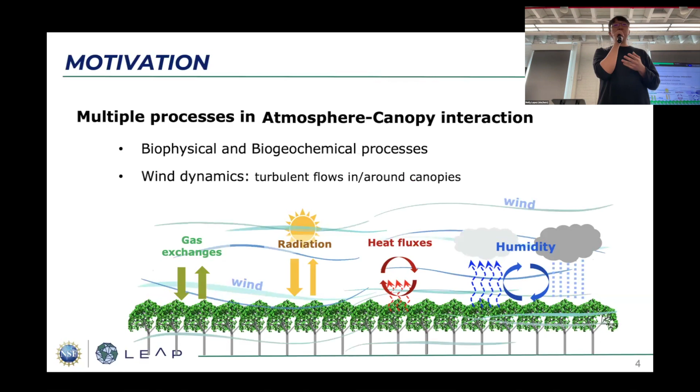Our interest is airflow-canopy interaction problems, and there are multiple processes between airflow, atmosphere, and canopies. First of all, there are biophysical and chemical processes such as gas exchanges and radiation, heat, and humidity fluxes. Another essential component is wind dynamics regarding turbulent flow in or around the canopies, which plays a key role in the various processes between the atmosphere and canopies.

In order to achieve a better understanding of microclimate, accurate predictions of airflow in canopies is quite an important issue. So this study mainly focused on providing a more advanced model for canopy flows.

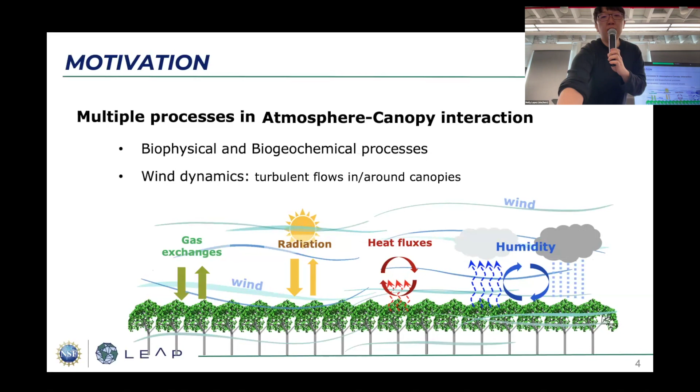But first, I want to briefly recap the existing work on the biophysical and chemical processes, which includes heat, humidity, and gas flux exchanges, related to photosynthesis, greening, sunlit shade, phenology, and so on.

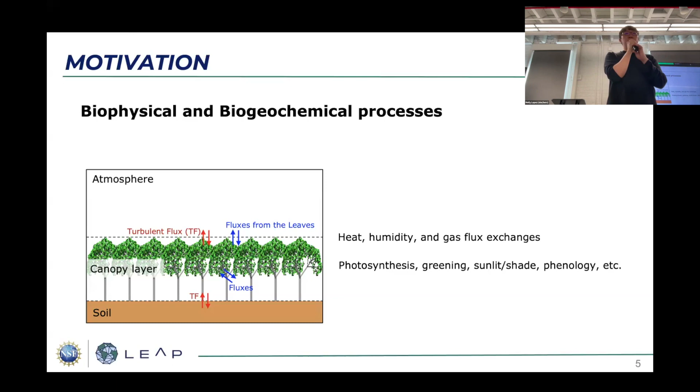In order to analyze these complex and multiple processes, there are a bunch of options. One of the most widely used, cheapest, and simplest is the single layer model. This model regards the canopy layer as big leaves, relying on homogeneous and isotropic canopy assumptions.

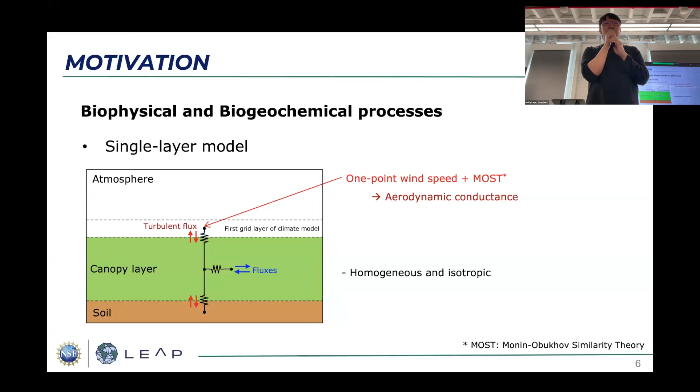I want to point out this model requires at least one point wind speed to assess aerodynamic conductance regarding turbulence fluxes between atmosphere and canopy layers.

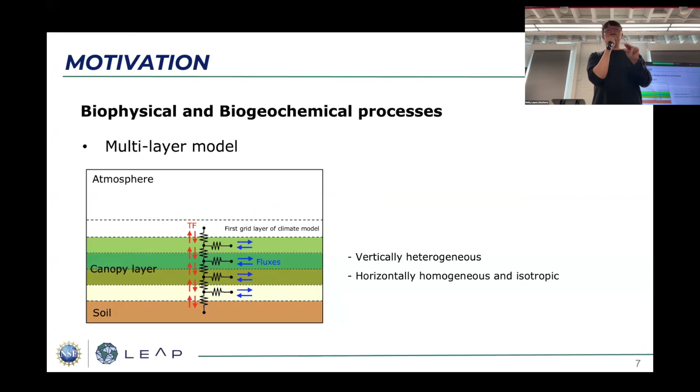More recently, a multi-layer model was proposed. This model can reflect the vertical heterogeneous structure of the canopies, but still relies on horizontally homogeneous and isotropic canopy distributions. This model requires a 1D canopy wind profile to estimate the turbulence fluxes between each layer.

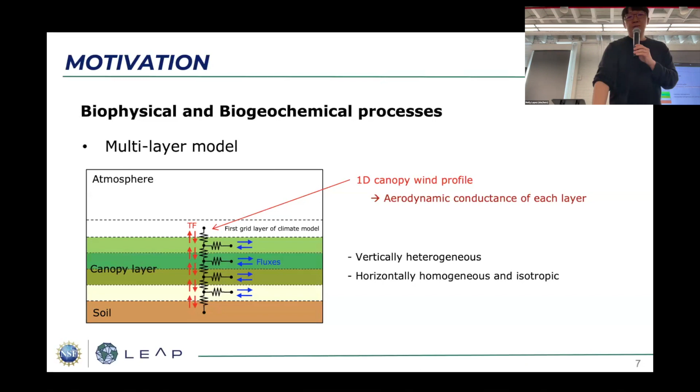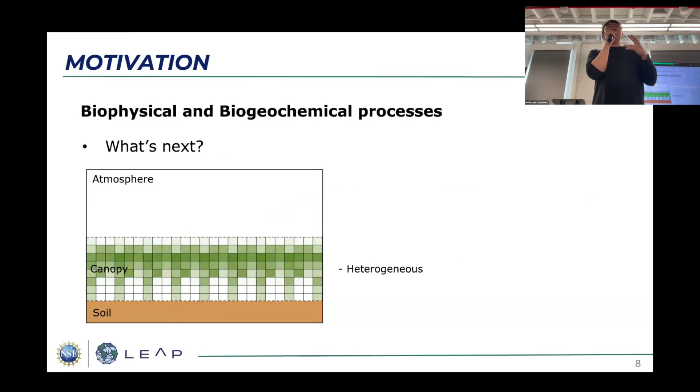As computational power keeps growing, the demand for more accurate prediction also increases. So what's next? In my opinion, it would be a much more advanced and accurate model that can handle heterogeneous canopies, so that we can deepen our understanding regarding microclimate situations.

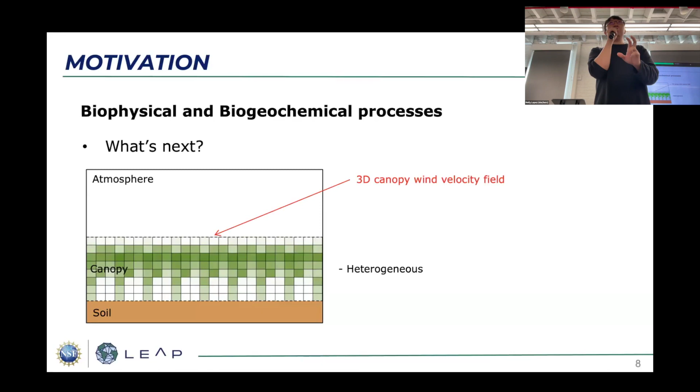These kinds of more complex models might require 3D wind velocity fields, but this is quite challenging to provide high fidelity simulations at these microclimate scales, due to its complexity and multi-scale nature.

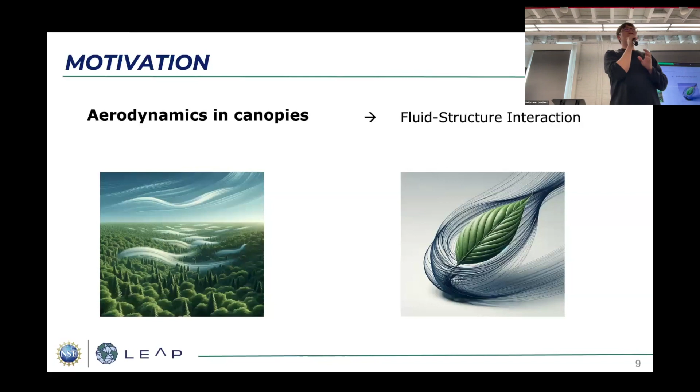Aerodynamics in canopies basically regards complex fluid structure interaction problems. This occurs on a broad continuum of scales, starting from leaf scales, trees, a bunch of trees, forest, and global scales. So if we want to provide high fidelity simulations...

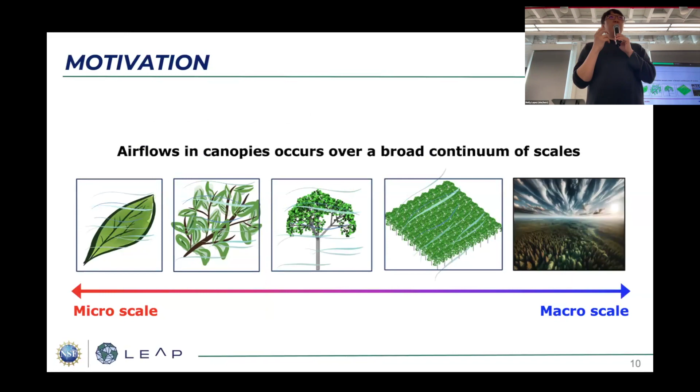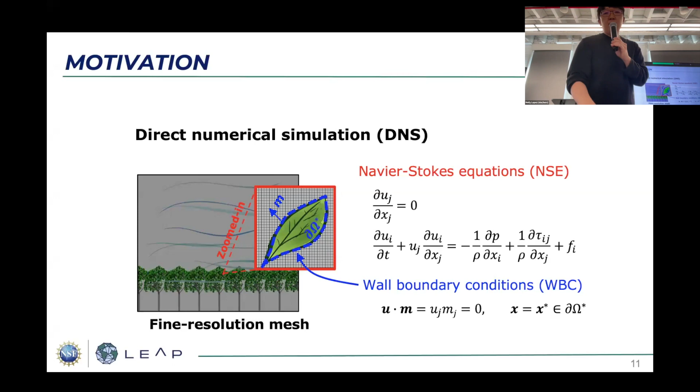...then the best choice is direct numerical simulation on fine resolving meshes, which resolve every single scale in the canopy and flow structures by imposing a wall boundary condition along the solid and fluid interfaces. But this requires a lot of computational cost.

This method can cover a bunch of leaves or branches, but it's not feasible for our scale of interest, microclimate simulations. So this is not a feasible way for our goal.

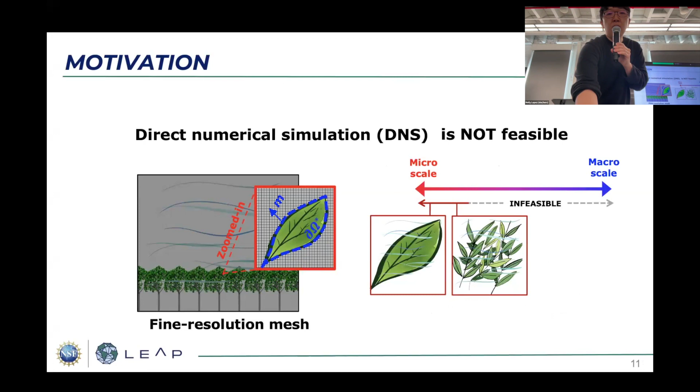Another existing approach is canopy drag models. This model neglects the physical presence of the canopies and just adds an additional source term, which has the meaning of a physical subgrid scale canopy drag effect.

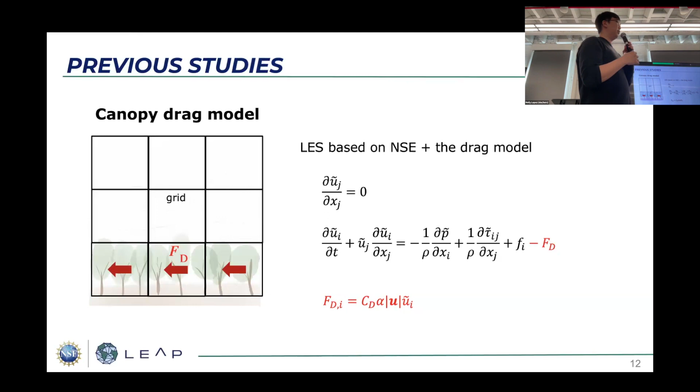This method is really easy to implement, but it adopts homogeneous canopy assumptions. So this method can only be applicable for quite large scales where homogeneous canopy assumptions make sense.

If we apply this method on heterogeneous canopies, it can be problematic because in these cases, the source term FD will contain resolvable information of some part of the inertial effect due to heterogeneities. So the parameter estimation for drag coefficient CD will be problematic in these cases.

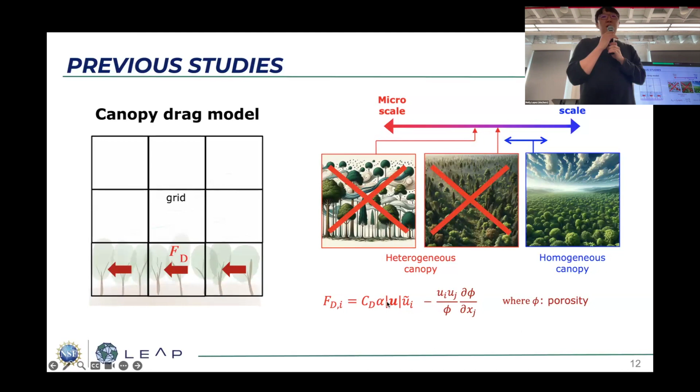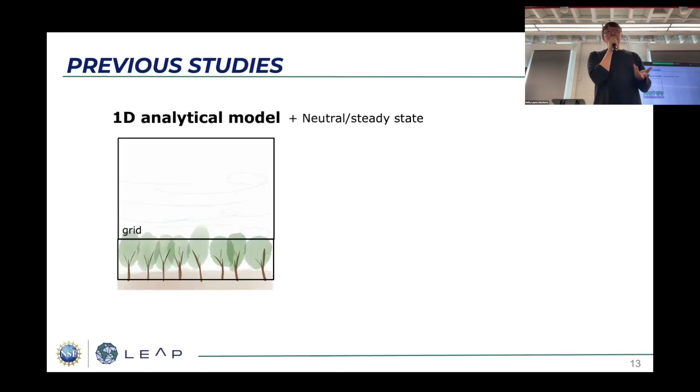Another way is adopting 1D analytic models. This model adopts additional assumptions, neutral or steady state. For flow over the canopies, the 1D model is used as wall models based on the concept of roughness height. For airflow inside the canopies, we solve a reduced version of the momentum equations.

This can be derived by applying a neutral state assumption and neglecting the inertial part, then we have this. Also utilizing gradient models and a mixing length hypothesis, and also using a canopy drag model, we can derive the 1D profile inside the canopies.

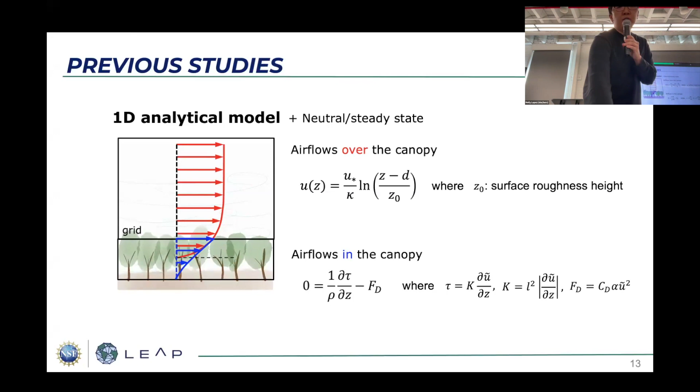Those models also adopt isotropic and homogeneous canopy assumptions, so they cannot be applied to smaller scale problems where anisotropy or heterogeneous canopies cannot be neglected.

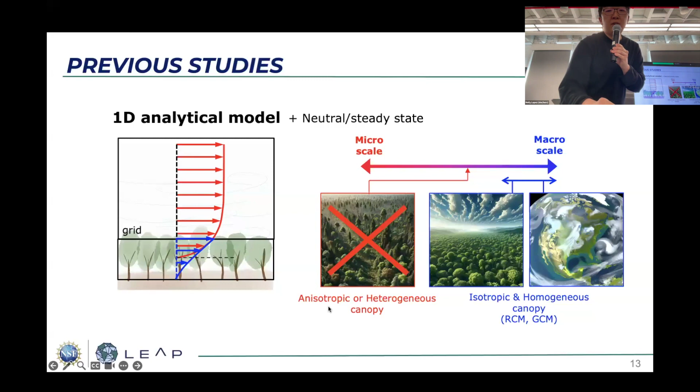The existing methods can be applicable only at a quite large scale, where the homogeneous assumptions make sense. Due to this assumption, those two methods have some limitation in terms of downscaling. And for DNS, a fully resolving strategy has its own limitation in terms of upscaling due to computational cost. So there is a missing gap, and the present study aims to bridge this gap by a multiscale method.

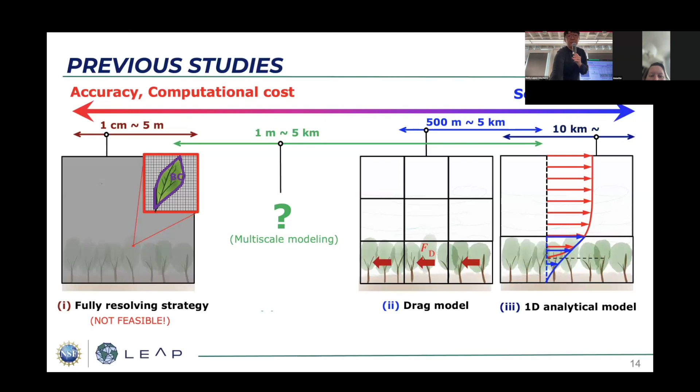In this range of scales, our scale of interest might be kilometers or hundreds of meters for the entire computational domain. In this case, the grid size might be a few meters, at least 50 centimeters, much larger than the leaf or smallest structure of the canopy. So we should consider a coarse grid model, where the grid size is larger than the smallest structure of the solid part.

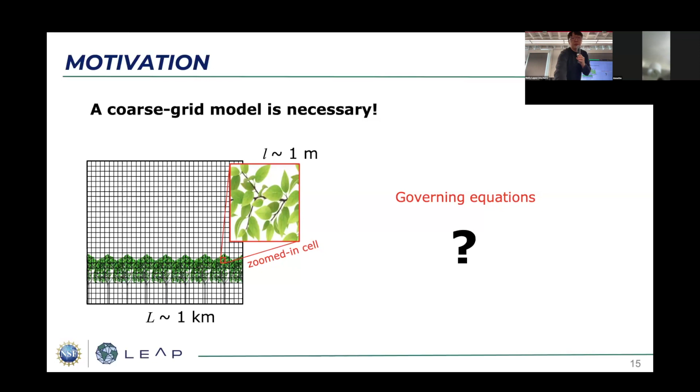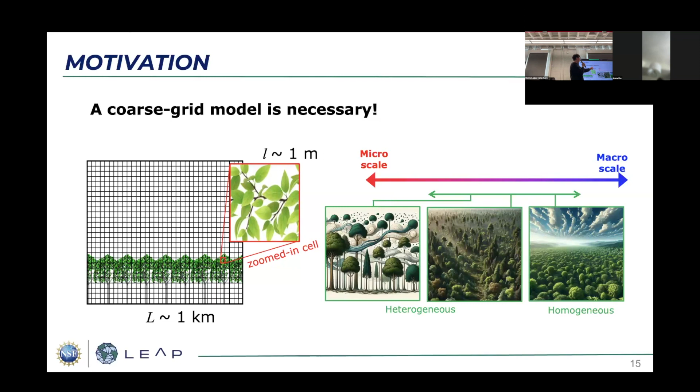So we need to formulate a coarse grid model, and it should be capable of handling heterogeneous situations, and implemented so it can cover the wide range of length scales to bridge the missing gap. For this purpose, we upscale the problem based on the volume averaging theorem.

In this, if we take the volume averaging, the solid part and fluid part in the given cells become homogenized, and they're represented by porosity, defined by the volumetric ratio between fluid and cell. Then the heterogeneous canopy fields can be represented by heterogeneous porosity fields.

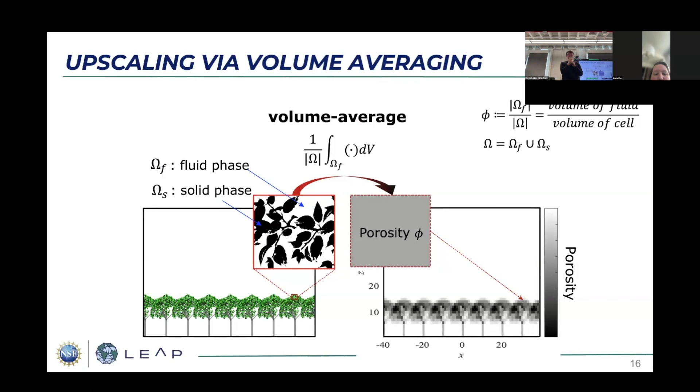Likewise, upscaling the incompressible Navier-Stokes equation, which is not feasible at our scales, gives us the volume average Navier-Stokes equation, which might be feasible. This formulation has two different scales: one is the resolvable scale, and the other is the subgrid or unresolvable scale.

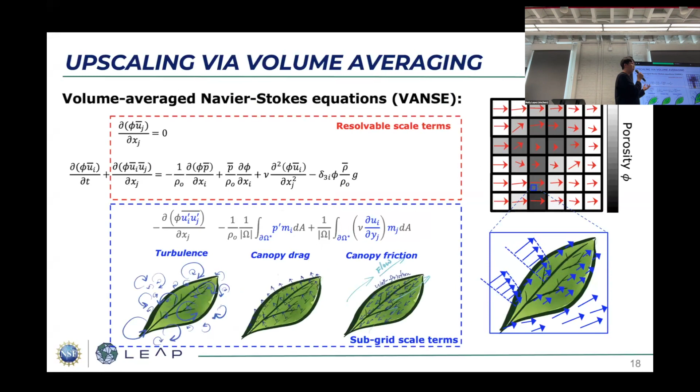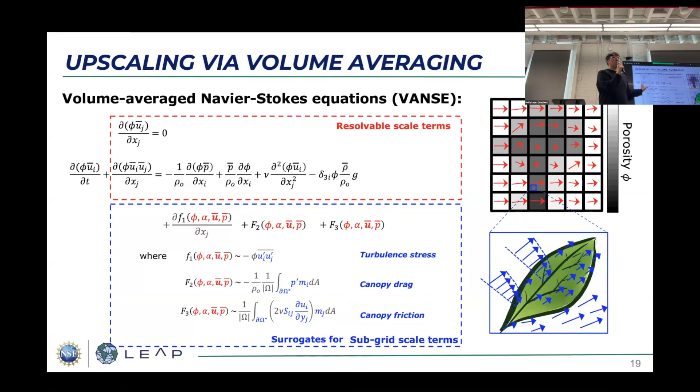The resolvable scale can be directly solved with numerical approximations on the finite grid system, but the subgrid scale terms cannot, because they include spatially fluctuating components, microscopic information much smaller than the grid size scale. So it should be replaced with surrogate models, and the surrogate model should be a function of resolvable variables to close the problem and make it solvable.

In order to do that, we proposed the following multiscale framework, which consists of a training step for the microscopic problem and a simulation step for macroscopic simulations.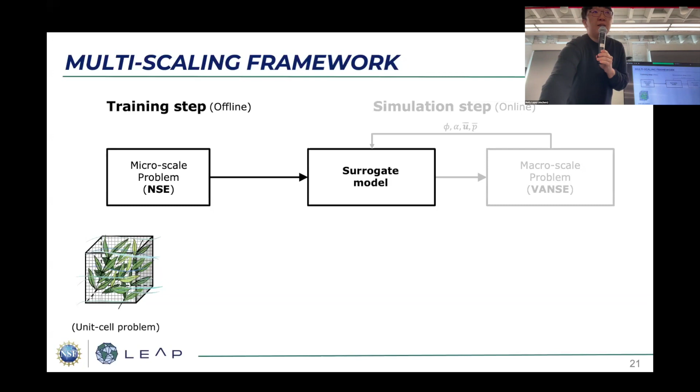For the training step, we consider a unit-cell problem, which is a representative and periodized microscopic structure of the canopies, and we idealize it to produce many unit-cell problems with varying parameters.

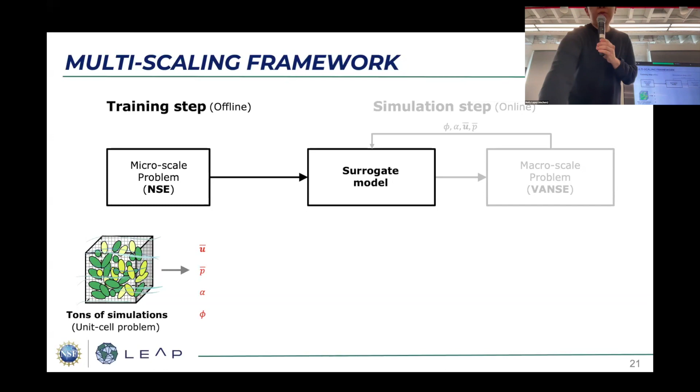Then for each unit-cell problem, we can directly compute the resolvable variable by taking cell averaging over the entire unit-cell domain, and we also directly compute the subgrid scale terms. Now we need to find the functional relationship from left to right, which will be done with supervised machine learning, and it will be coupled with the volume average Navier-Stokes equation solver.

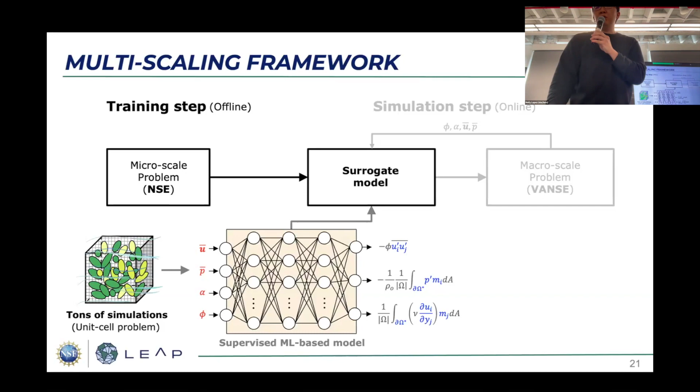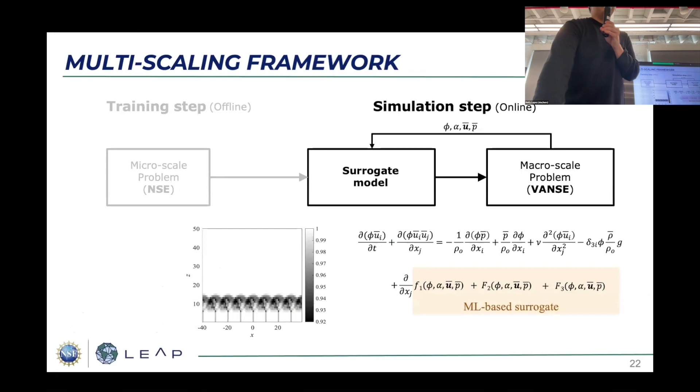Then in the simulation step, we solve these equations, where the subgrid scale part is replaced with the ML-based surrogate model. Once the problem is closed, we can solve it and perform the macroscopic simulation for canopy flows, like this.

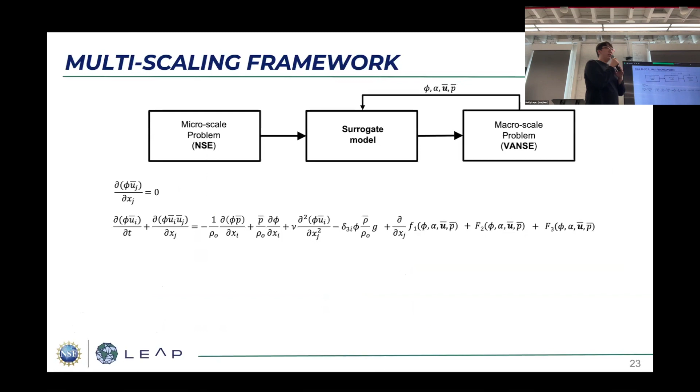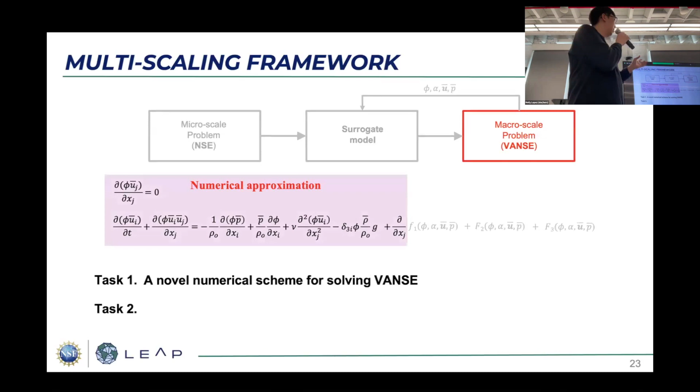In order to accomplish this framework, we need to complete two tasks. First, we need to implement a stable and accurate numerical scheme for the resolvable part of the volume average Navier-Stokes equations.

Second, we need to train the ML-based surrogate model for the subgrid scale terms in the volume average Navier-Stokes equations.

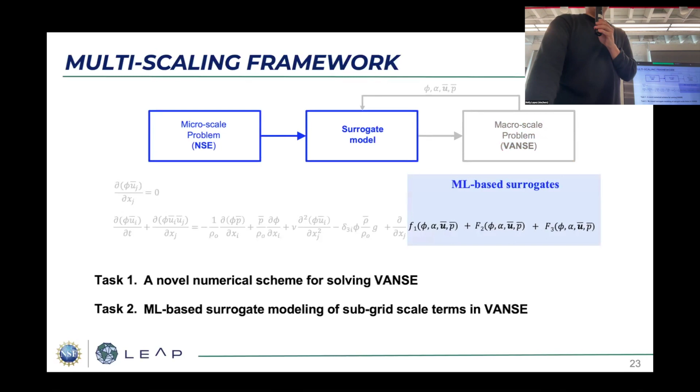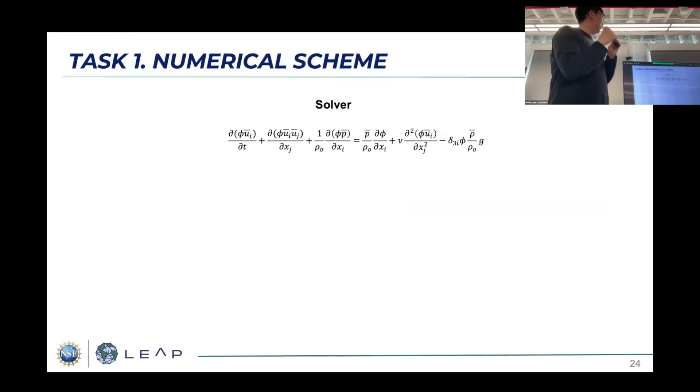For the first task, we developed a novel numerical scheme, and the story is quite long. To make it short, we implemented a high order method based on three schemes.

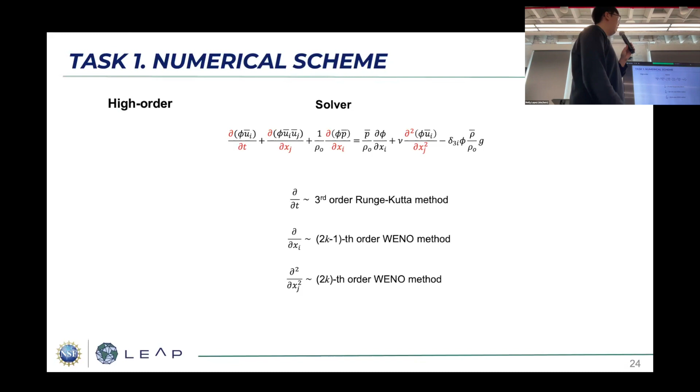First, for temporal integration, we use a third order Runge-Kutta method. For the first derivative, the spatial derivative of the flux term, we implement an odd order finite volume WENO method, and for the second order derivative we use an even order WENO method. We also formulate our scheme so it has a well-balanced property to achieve balance between flux and source terms.

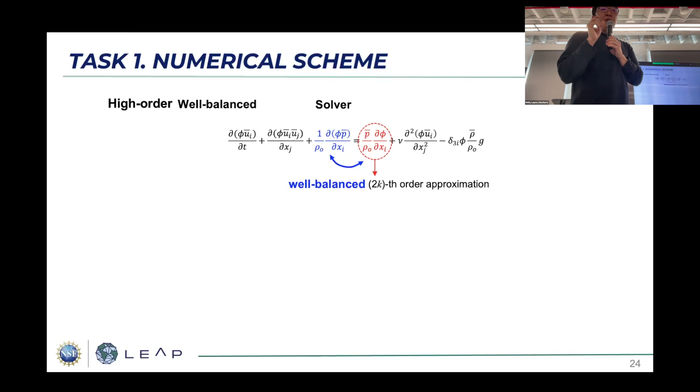This example shows a stationary condition with zero velocity over irregular porosity. Our solver preserves the stationary exact solution up to round-off errors.

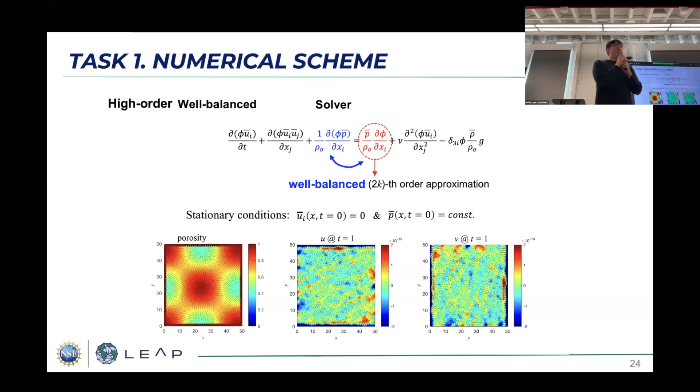If the scheme doesn't have the well-balanced property, unwanted flux occurs at the level of truncation errors, and it contaminates the entire domain. Fortunately, our scheme has the well-balanced property, so it's good.

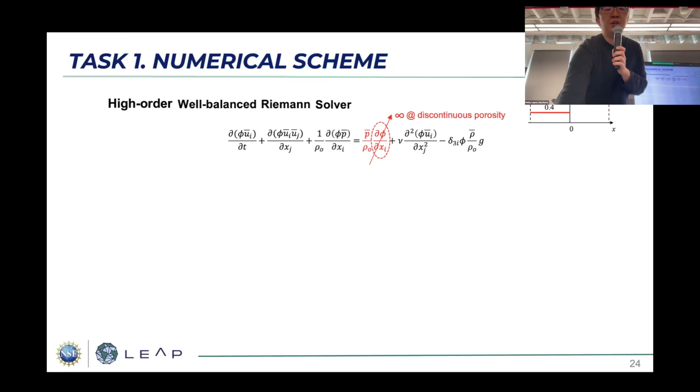We also consider a Riemann solver, which can treat strong heterogeneity situations, including discontinuous porosity.

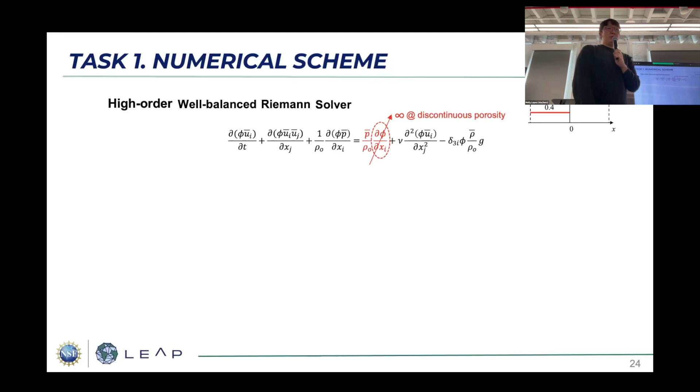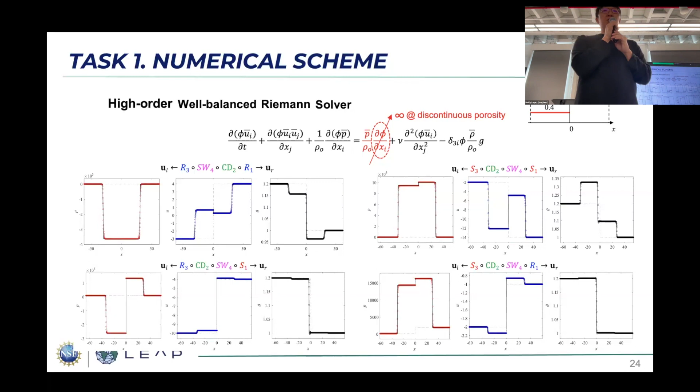In order to achieve this Riemann solver, we first derive the exact solutions of this discontinuous problem over discontinuous porosity, then we provide and prove mathematical theorems regarding the uniqueness and existence of discontinuous solutions over discontinuous porosity. We confirm that our Riemann solver, designed based on these theorems, satisfies them, so our Riemann solver can capture all types of discontinuous solutions over discontinuous porosity.

So, this study is prepared as a draft entitled like this.

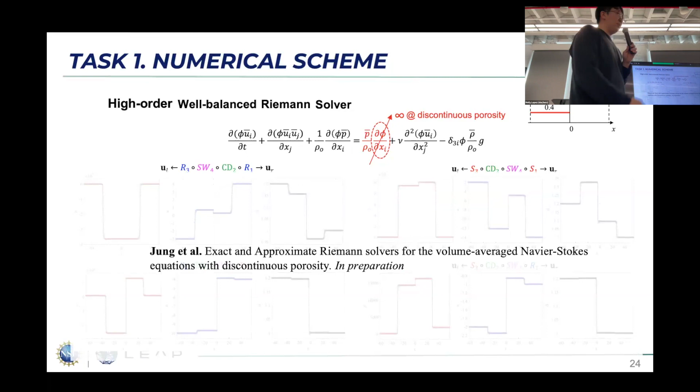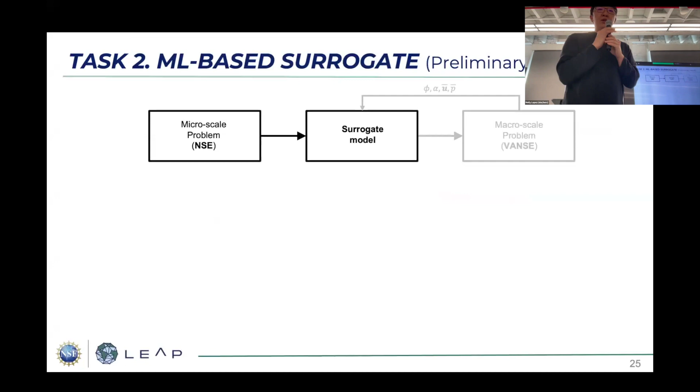For task 2, we need to build the ML-based surrogate models. First of all, in order to verify that our framework works or not, here we consider very simple unit-cell problems with only one single squared cube.

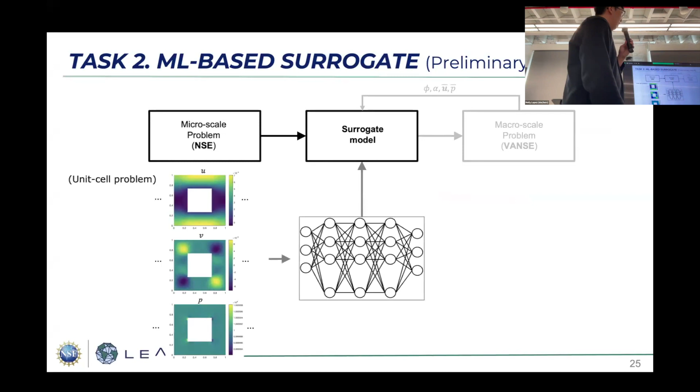Varying the size of cubes, the Reynolds number, and the flow angle, we produce tons of simulations, then train it and couple it with the volume-averaged Navier-Stokes equations.

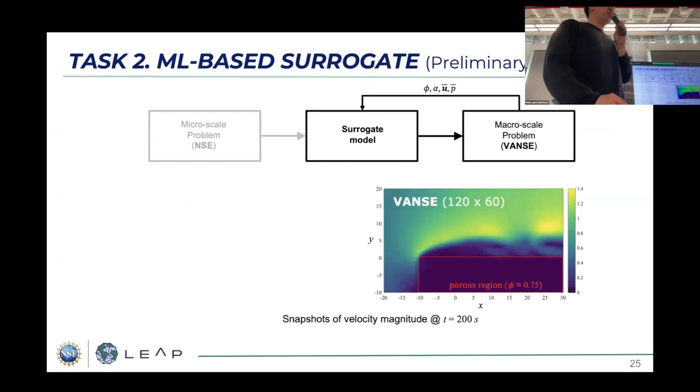Then in the solution simulations tab, it gives this kind of coarse resolution simulation, which shows good agreement with the reference solutions, the DNS solutions. So this is also another type of work.

My takeaway from here is if the unit cell problem is well designed, then the multiscale framework can yield accurate prediction.

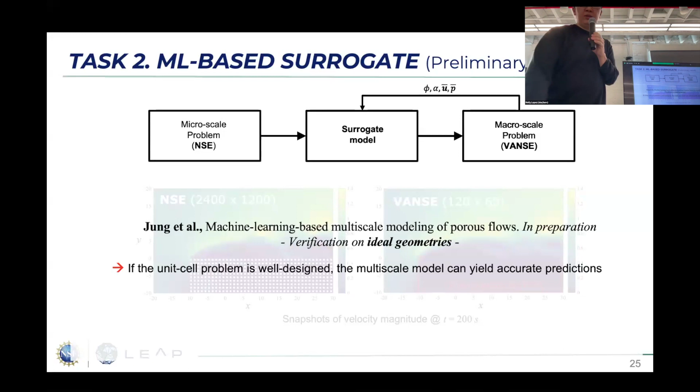So now, at this moment, we are challenging for the realistic canopy flows. And the major key question we are facing now is how do we design the unit cell problems for the plant canopies?

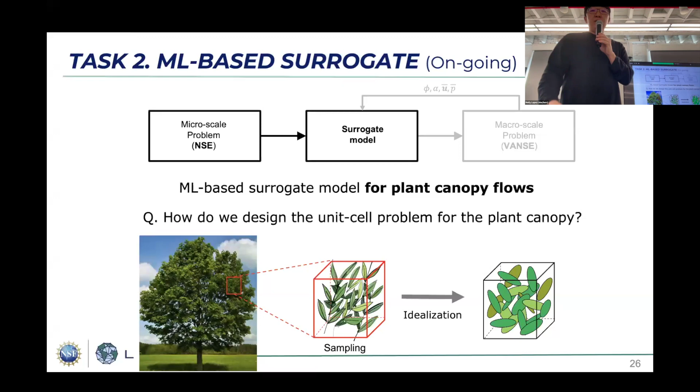So in order to do it, we implemented the artificial tree generator, comprised of a fractal branching part and a leaf structure approximating part. Then we have this kind of synthetic tree.

If we recognize the dominant species of the tree in the target area, then we can generate this kind of synthetic tree by giving that information to the artificial tree generator.

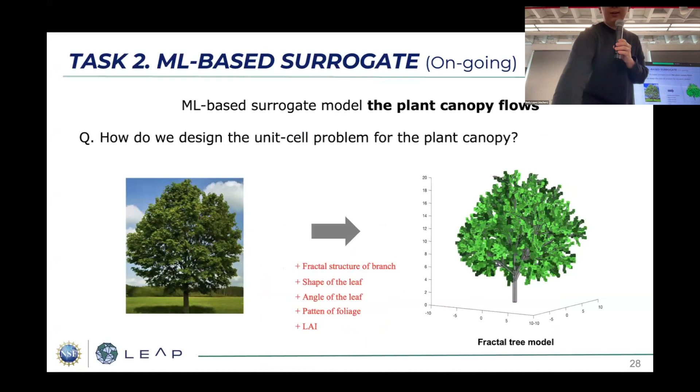If we divide the tree into two parts, part 1 is the crown part and part 2 is the trunk part. Let me explain part 1 first. We also implemented sampling modules.

Using this module, we can sample like this, the smallest structure inside of the canopies. This is what we have done so far, and after here is kind of a plan, future plans.

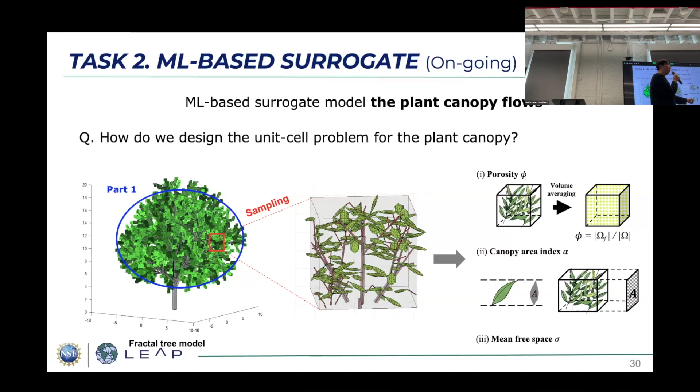If we sample here, then we can extract some geometrical parameters such as porosity and canopy area index, comprised of leaf area index plus branch area index. We also extract a mean free space between leaves or branches.

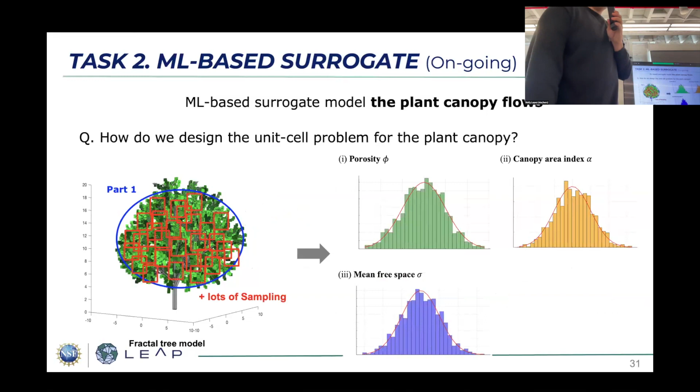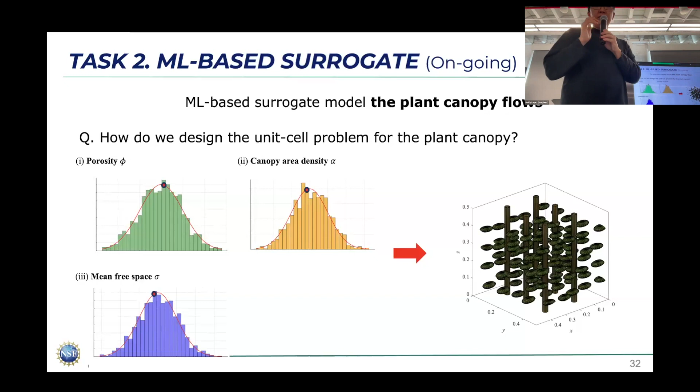A large number of samplings gives a PDF function for each parameter. Then based on this PDF function, we will generate a statistically ideal and representative unit cell geometry. This was for part 1, and part 2 is much simpler because it only contains the trunk part.

But basically we will resolve it using a boundary condition if possible. But if not, when the grid size is much larger than the diameter of the trunk, then we should consider a unit cell problem. The size of the unit cell problem can be different depending on the flow condition.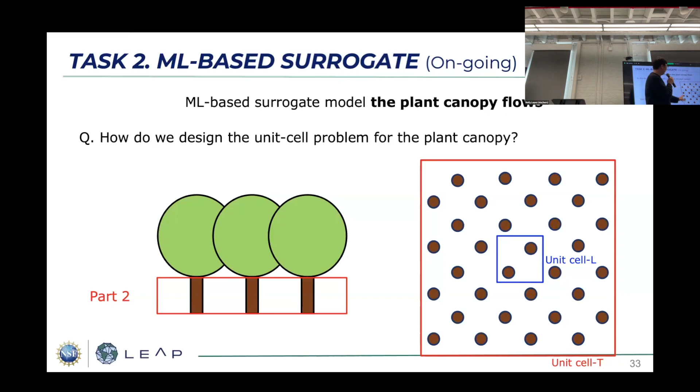So for laminar flow, the unit cell can be this size, and for turbulent flow, the unit cell should be much larger.

And this is our idea for how we design the unit cell problems. Using this geometry, we're going to train the surrogate models, and eventually we believe that our method can be extended to cover a wide range of scales by extending it to multiple steps recursively.

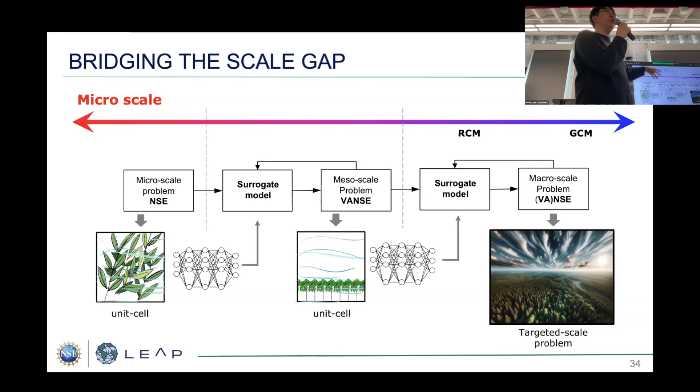And this is a summary. Thank you so much.

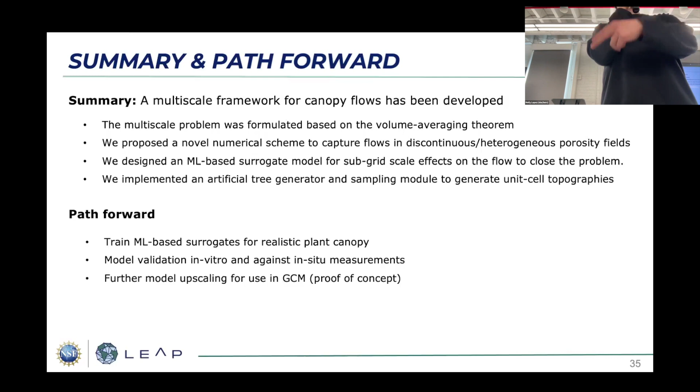So did you face some numerical instability when you ran the online simulation? Actually it's not, because our solver is a discontinuous solver, so even though there is a big difference between each cell, it can capture some discontinuous solution due to that. It gives some solutions, though we need to check if they are physically reasonable or not. But so far we don't have an instability issue yet.

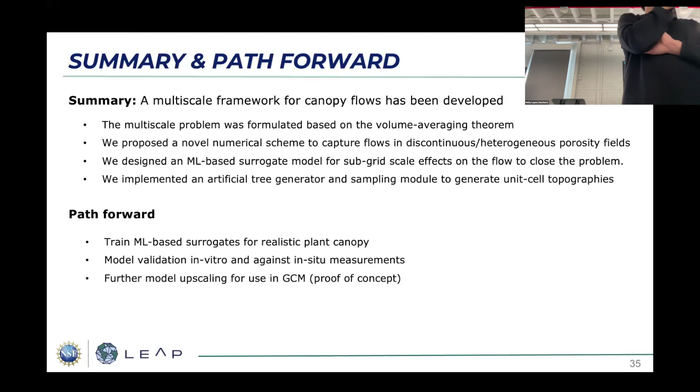Actually, that is our next step, to provide realistic validations. At this moment, we've checked the advantage of our model in terms of mathematical aspects so far—it's mathematically more stable and can cover a wide range of scales. So your question might be our next step.

We are looking for very nice in-situ observation data so that we can show our superiority compared to existing ones—where the existing method cannot capture something, but ours can. We're trying to find good application areas like that, but not yet. I can't say my model is always good in physical applications, because I don't have evidence yet.

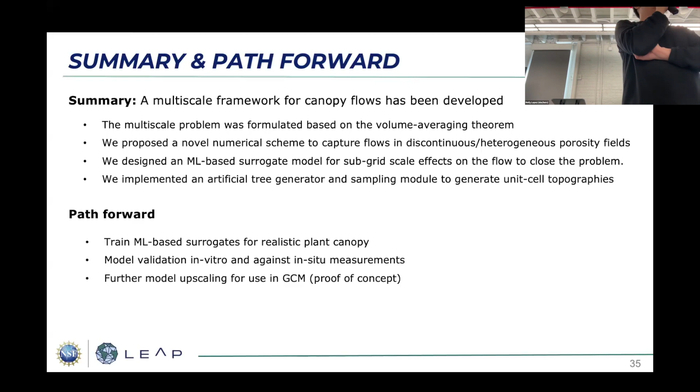And we have a question from the chat: sorry if I put the inflection in any weird places in these words, I am not a modeler. Shouldn't it matter that the trunks are currently spaced in a diamond grid? There are genetic algorithms for plotting—is this what you're talking about now? I don't think it would be as laminar.

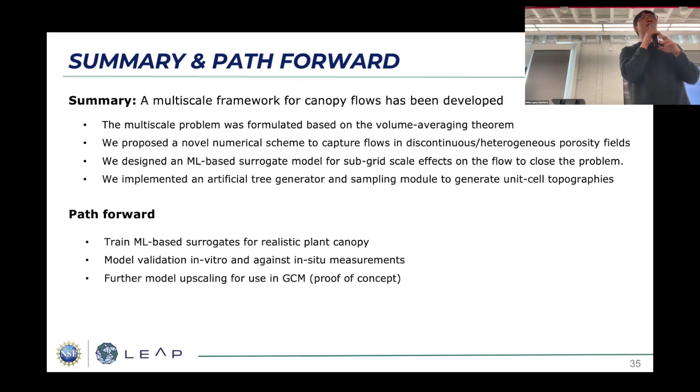Okay, this is kind of a simple schematic example to show you that, depending on the flow and the geometrical structures, the unit cell can change.

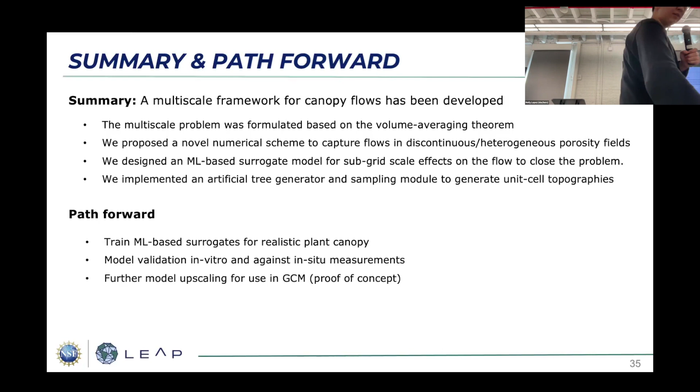This arrangement is just an example, and for realistic cases, we will observe with remote sensing. We can get a more exact configuration of it. And here, if I compare between laminar and turbulence...

Actually, there were some studies related to the question of whether macroscopic turbulence can survive inside this porous media. It depends on the porosity, and it depends on the pore scale, the length scale of pore size, and the flow speed.

When the porosity is quite low, the macroscopic turbulence cannot survive inside the domain, so in that case we can use the unit cell problem with this blue line. But if there is some macroscopic structure larger than pore scale, we should consider a larger unit cell problem. So to address these issues, these are just example figures.

Do you have a term for the distribution of the leaves inside your cell? Because with wind, they vary. Do you have a term for that in your equation?